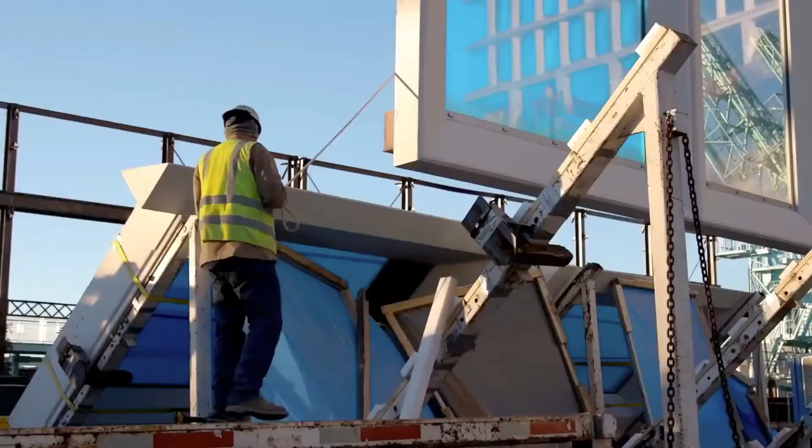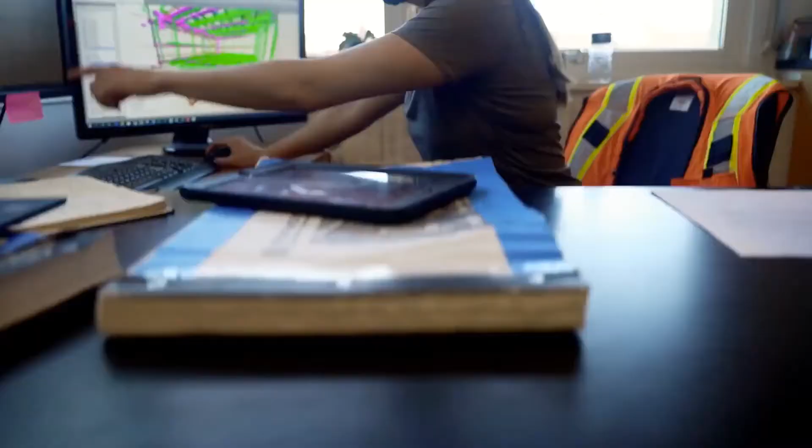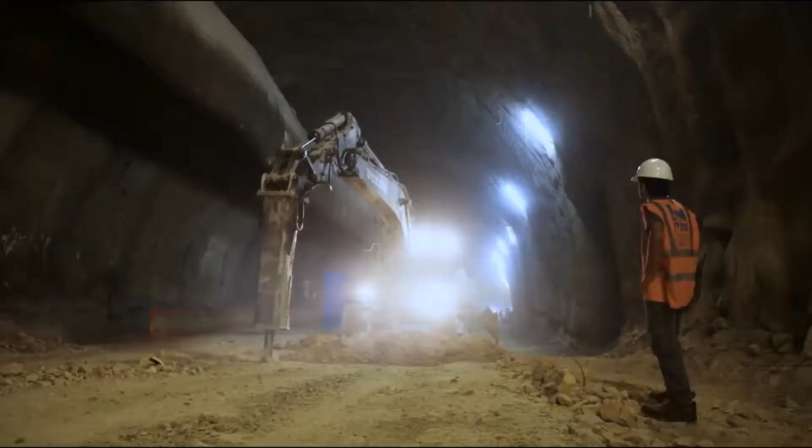Autodesk Build leverages best-in-breed mobile and drawing experience from plangrid, mixed with powerful data insights and project management workflows. This delivers a broad, deep, and connected set of field execution and project management tools in a single software platform that's easy to deploy, adopt, and use. Build provides an environment where information sharing and workflows are both tightly controlled and highly configurable. With these mobile capabilities, teams can streamline communication and documentation, capturing what happens on a project and solve any necessary issues by leveraging both field and office staff at the same time from any device.

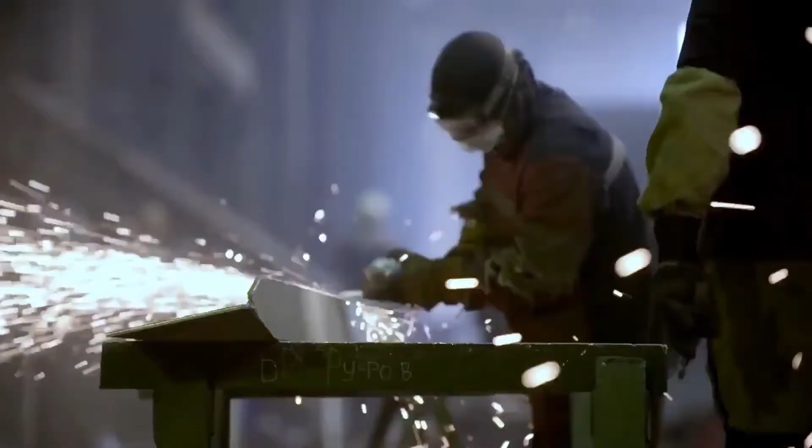plangrid and Autodesk Build both live within the same mobile application called plangrid Build. The video following the survey is designed for plangrid users considering the upgrade to Autodesk Build.

When I first open the app, you're going to be taken to the project screen. And these are all the projects that are associated with your account for both your plangrid projects as well as your Autodesk Build projects.

Very similar to plangrid on the build side of things, you can absolutely download projects from your account onto this device so that the information is locally cached and stored. It's going to be really helpful when you're going to a job site that maybe has limited connectivity. You're going to be able to continue working, flag your punch list items, make your markups, and then when you're back within Wi-Fi range, your data is going to be automatically pushed to the cloud for the rest of your team to access. So projects on this device, as well as projects in the cloud, just like plangrid.

Jumping into a project here, we're going to notice an update. The first thing we're going to see is the home screen. This is very similar feel and experience to Autodesk Build's website, now within the plangrid Build app for all Autodesk Build projects, designed to give you a 30,000-foot view of your projects and your assignments.

So things like assigned work, if you have issues that are in your court, you can see if they're ongoing or overdue, as well as the rest of the project for other issues. If you have to fill out a daily report or a timesheet every day, you're going to see those assigned forms in the bottom left of the home screen. On the right-hand side, you'll see things like sheets that are favorited, things that are searched for recently, as well as files that you've viewed recently as well. Really designed to give the ability for field teams to access information that they access often very quickly.

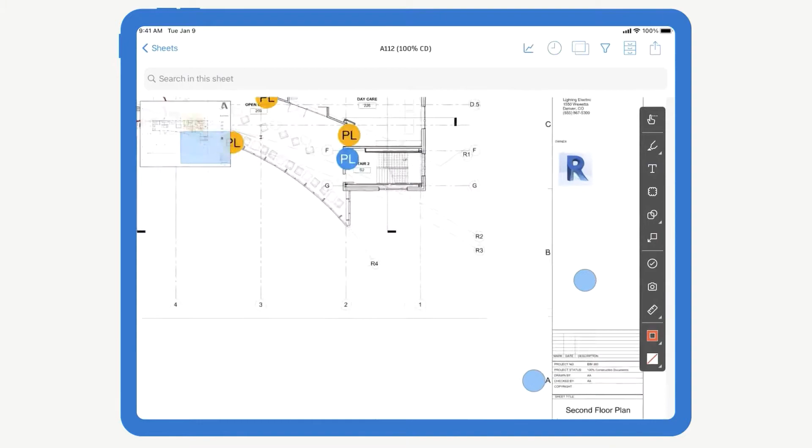In Autodesk Build's Sheets module, just like plangrid, when you import a project into Autodesk Build, we're going to take care of three things for you. Optical character recognition built into the platform is going to scan the title blocks for us, and it's going to look at the sheet title and the sheet number, and it's going to automatically name and number those sheets. It's going to save a lot of time on the administrative side.

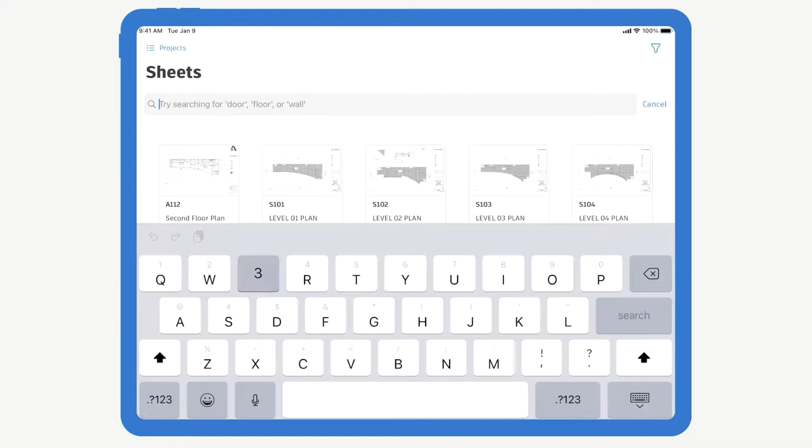These drawings are going to be searchable by name, number, and text. Helpful for locating rooms, keynotes, or maybe general annotations throughout the document set. So if I'm looking for a specific room number, I can type that in, and it's going to highlight that for me very quickly right on the drawing, and I can jump right to it.

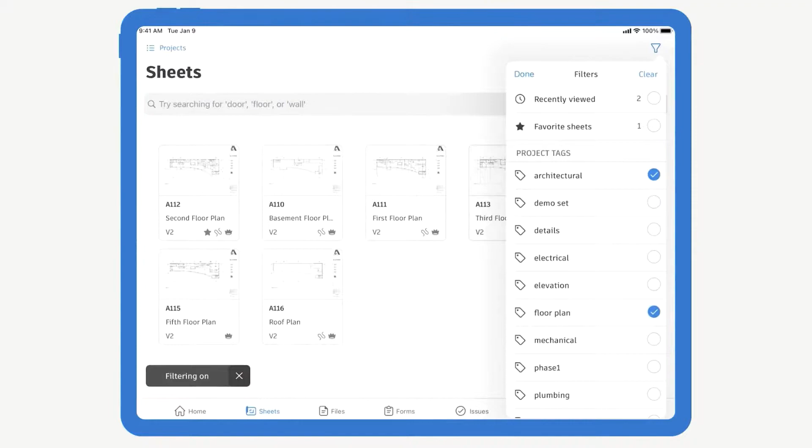Just like plangrid, these drawings are going to automatically be tagged for us based on the AIA sheet disciplines for very easy filtering. So if I'm an owner, an architect, or a contractor, and I'm working with a very large document set, it's very easy to filter down to a specific scope of work and even layer on multiple tags to get to a very specific subset of documents within my document set.

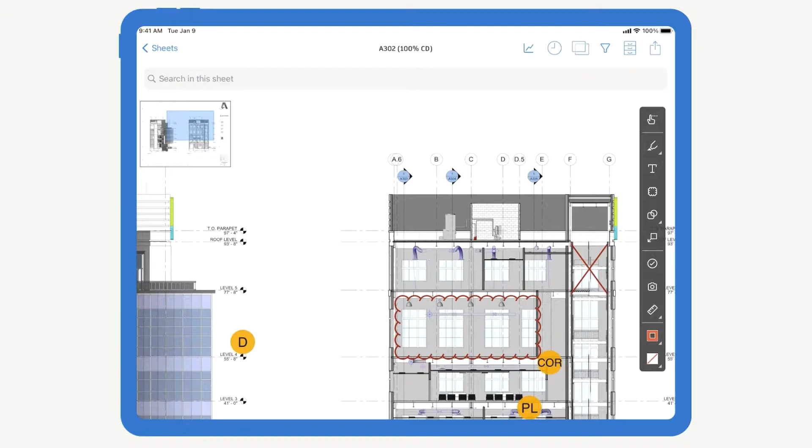Just like PlanGrid, if I'm uploading documents that have sections and elevations, this information is going to be highlighted for me, and they're automatically going to be hyperlinked to each other. It's going to be very easy to flip between plans and elevations, and then use the clock icon to jump back to whatever I was looking at previously, saving time on getting to the information that I need.

Also, on upload, we're going to take care of the versions of the drawings for you. So if you have a bulletin, an RFI, an ASI, or if you're involved in the design process and you're tracking 75% CD to 100 or something like that, we're going to take care of those multiple versions of these drawings for you, and we're going to slip sheet the drawings for you.

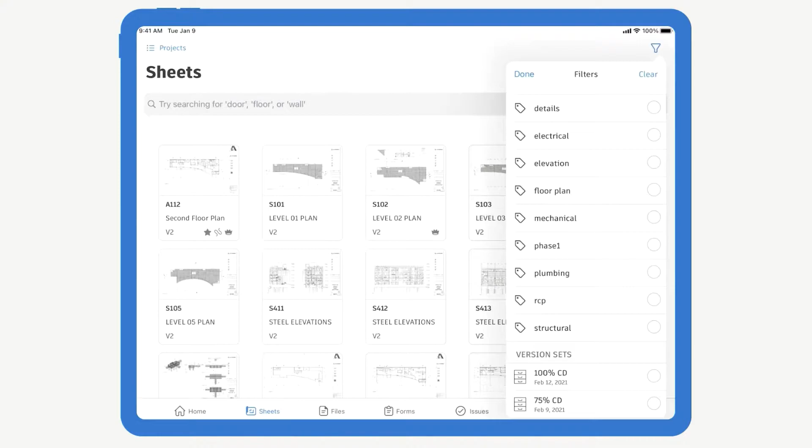The key to remember with this is anyone out in the field doesn't really need to think about this, whether there's 1, 2, 10 versions of every drawing. By default, anytime you jump into any drawing, you're going to be taken to the latest and greatest version of that drawing, while still being able to access old information.

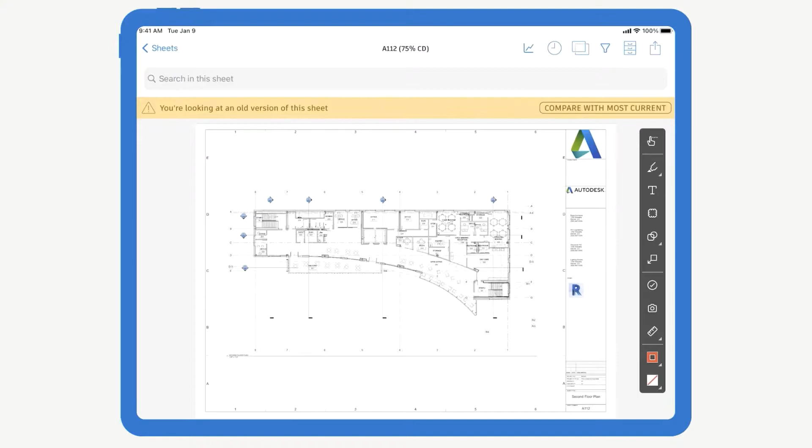Anyone that's looking at old info, just like in PlanGrid, we're going to keep that really important warning label right at the top to let you know you're looking at an old version of this sheet, but also being able to compare it with the most current document. Even if there wasn't a cloud or something from the design documents, being able to quickly overlay those changes and see the update is going to be really powerful.

Just like PlanGrid, if we want to share this or anything else that we're looking at from a mobile standpoint, we can easily hit the share button and just create a quick snapshot to populate an email to send to anybody that we want.

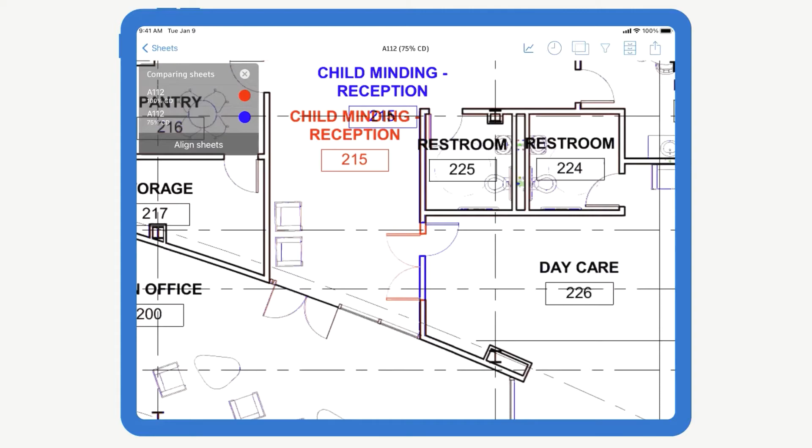Like PlanGrid documents, Autodesk Build's files houses additional project information to further mobilize your workflow. Folders and files within Autodesk Build can now be associated with project templates, cutting down on administrative time during project setup. Folders can be created for different teams with different permission levels if you choose to do so.

Just like PlanGrid, the file section is going to support specifications, cut sheets, O&M manuals, really anything you want to equip your field team with other than sheets.

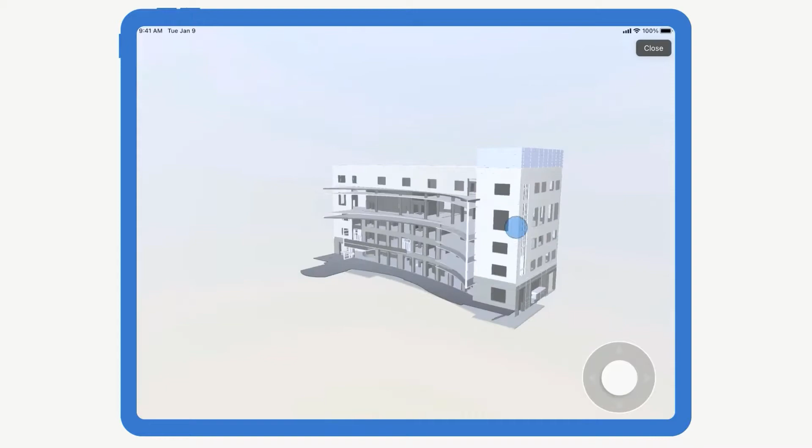One of the major updates to the file section in Autodesk Build is the ability to leverage native 3D models coming from Revit or Navisworks. So with a simple drag and drop of those files into the file section of Autodesk Build, now our field teams can access that information right from the job site. This is really going to help to connect 2D and 3D workflows all in the same common data environment inside of Autodesk Build.

Autodesk Build inherits the same easy-to-use workflows for field reports from PlanGrid, now called forms. So whether you're choosing to use the digital out-of-the-box forms for things like a field report or a job hazard analysis or a timesheet, you can choose to do so.

Fill in the work right from the job site, explain who was on site for that day, how many workers there were, how many hours, and even use the dictation tool to fill this in, such as 'ductwork installed in kitchen.' Work through your daily report, add things like materials, reference equipment, maybe sign off on it as the foreman, associate any photos you need, and submit that directly back to your office team.

So whether using the digital report or uploading company templates that you're already using as a fillable PDF, it's really easy to digitize forms in Autodesk Build, just like it was to digitize field reports in PlanGrid.

In Autodesk Build, for those that use PlanGrid's task functionality heavily for things like punch lists, maybe constructability reviews, a design review, or just general task management and communication between the field and the office, rest assured that you're going to be able to do that very easily in Autodesk Build as well. Build's Issues module is that flexible tool that's useful during all phases of the building lifecycle.

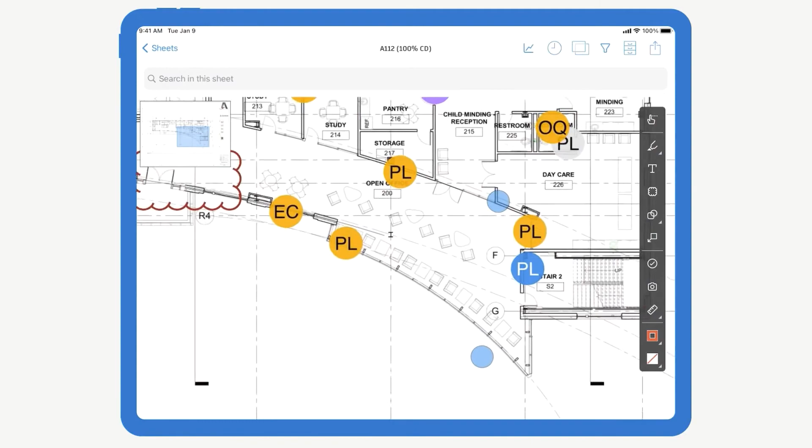You'll see any issue created, whether in the office or the field, will live in this issue log that's easily searchable and filterable by things like status, assignee, and dates. If I ever want to create that punch list item or something I'm noticing out on the job site, it's still just as easy as clicking that check mark, just like in PlanGrid, and pulling up that list of issues. Just like PlanGrid, where you could have a task stamp as well as a list, you have issue categories and issue types, so very flexible depending on permissions on how you want to set this up for your team.

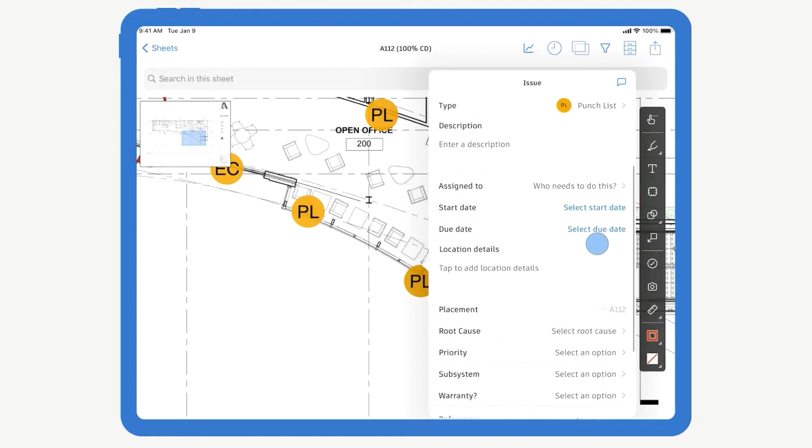Simply pin the stamp next to the drawing and you're able to pull up the flyout where you can fill in similar information to PlanGrid, like the description, who you're assigning this to, making this actionable with dates, associating photos, and all of that good information.

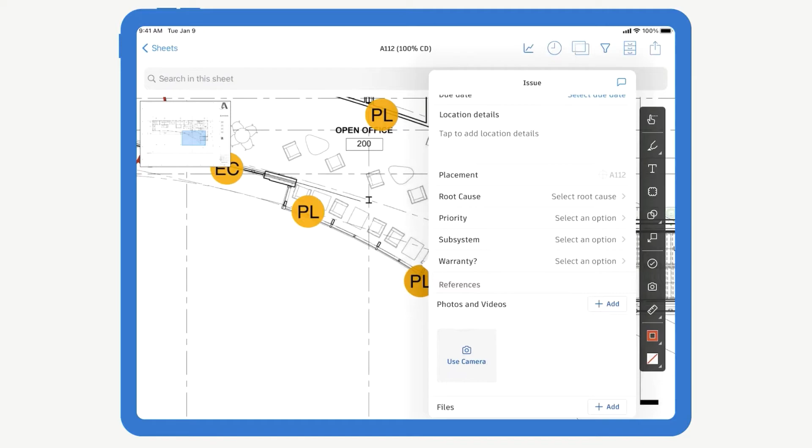The mobile app is now equipped with some powerful additions like assets, RFIs, submittals, and meeting minutes.

Within assets, easily track project assets and link them to their relevant information. For example, I'm going to pull up a refrigerator, and I'm going to be able to quickly see the name of that fridge, the category, the status, as well as the location. If I have a barcode on that item, I can scan that. So if you're doing prefabrication or anything like that, you can absolutely use the scan barcode function as part of the Autodesk Build mobile experience and associate it with the asset.

We can also reference photos, the barcode itself, maybe files that are associated with it, its submittal, any issues that came up with this asset itself, and any sheet that it's linked to—really connecting all of the project information related to that asset in one place right within Autodesk Build.

For RFIs and submittals, you can provide the team with searchable, filterable, easy to access information about RFIs and submittals, really making sure your team is always up to date with the latest information. So you're going to have that RFI log right at your fingertips, search for whatever you need, search by status, and access information that's associated with this RFI on this job.

Same thing with submittals. Easily access project submittals, quickly look at the status, whether it's a draft, whether it's approved, rejected, and access that information very easily right from the mobile device.

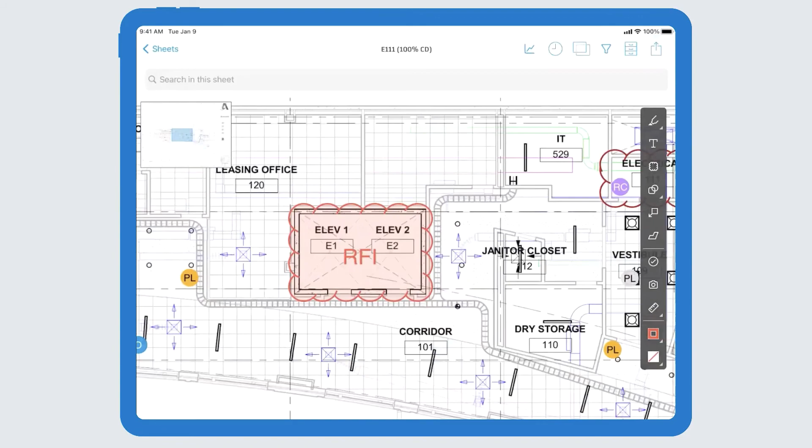Just like in PlanGrid, I'll see the linked RFI, submittal, or document here. I can click on it, get an overview of that information, or jump to the details and see all of the good information associated with the element, in this case, an RFI.

Within Photos, now we have native support for not only photos, but 360-degree photos, videos, as well as the ability to categorize photos by their tags. So if you want to get to a quick subset of the photos on a project, you may have thousands of photos on these jobs. You can quickly just jump to 360-degree photo in this case and access that information very quickly.

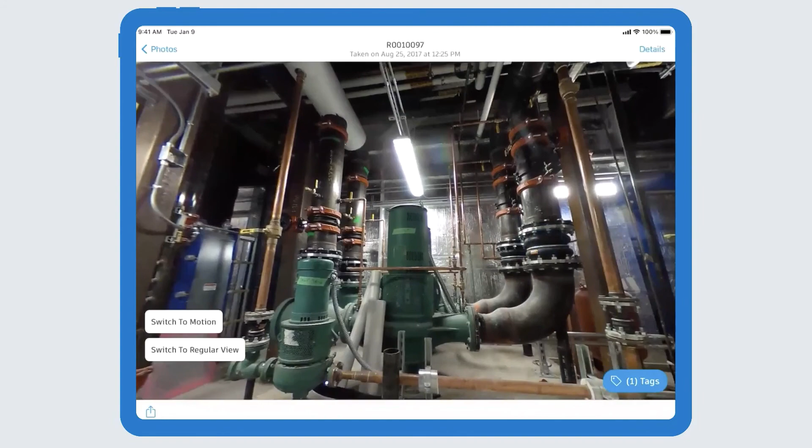Really centralizing all of the photos, videos, 360-degree photos in one place, as well as being searchable and categorizable with tags.

Finally, for meeting minutes, having access to the meeting minutes from your mobile device is just another way that you can be sure that the latest discussion between team members, whether you're in the field or the office, are easily accessible, further connecting teams from the office and the trailer.

Now, having access to all of your project management workflows, as well as the field and office collaboration, just like PlanGrid, you're able to really have a common data environment for all of your project information right inside of Autodesk Build.